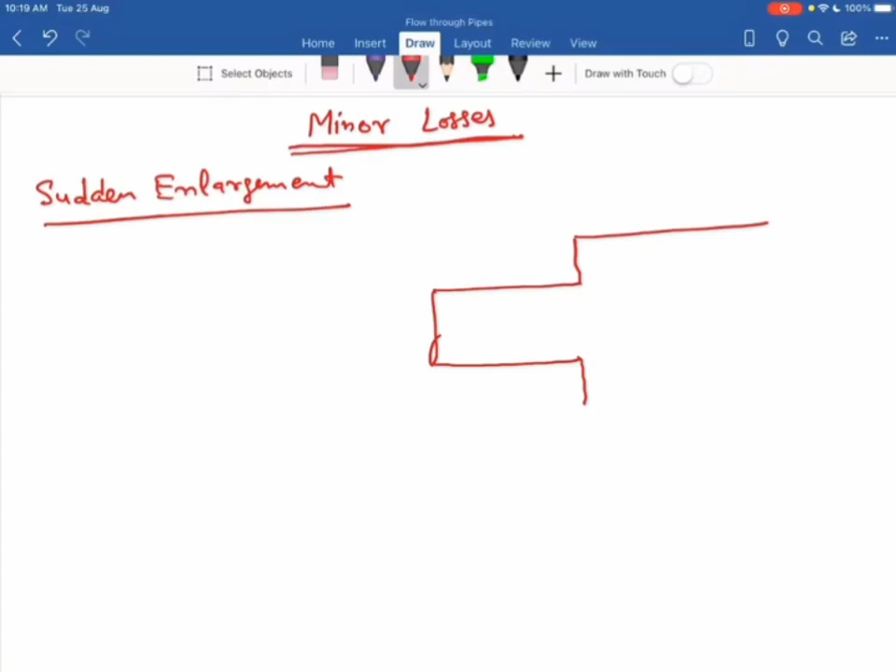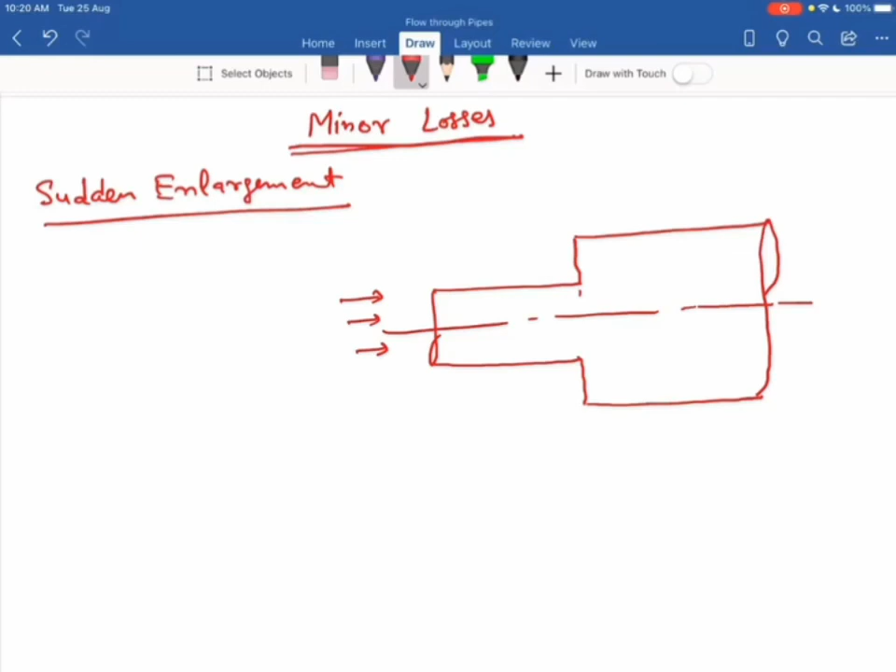Now say we have this pipe. At this section, it suddenly enlarges. This is the direction of flow. So I consider here two sections: one is at the entrance, this is my section 1 and this is section 2.

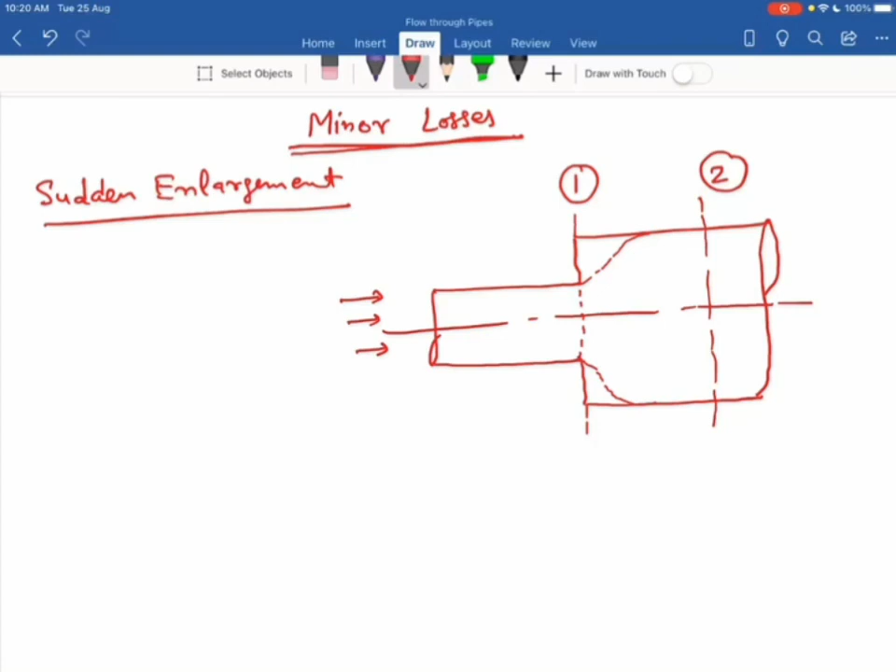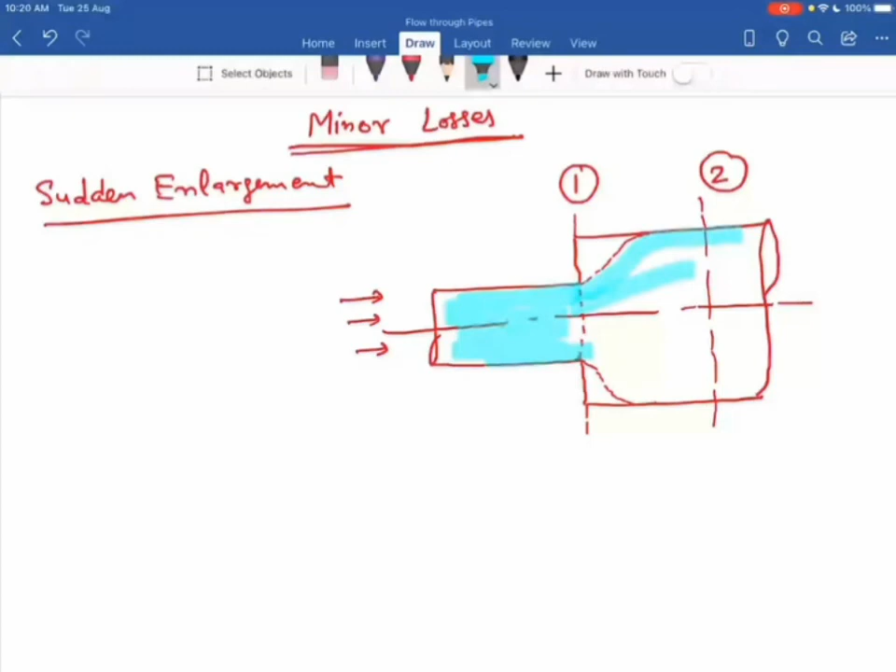When liquid comes out from this end, it takes a shape like this. The water coming out from this pipe takes a shape like this. In this region, you can see the air is entrapped, so that air is under circular state. So I have two sections now, section 1 and section 2.

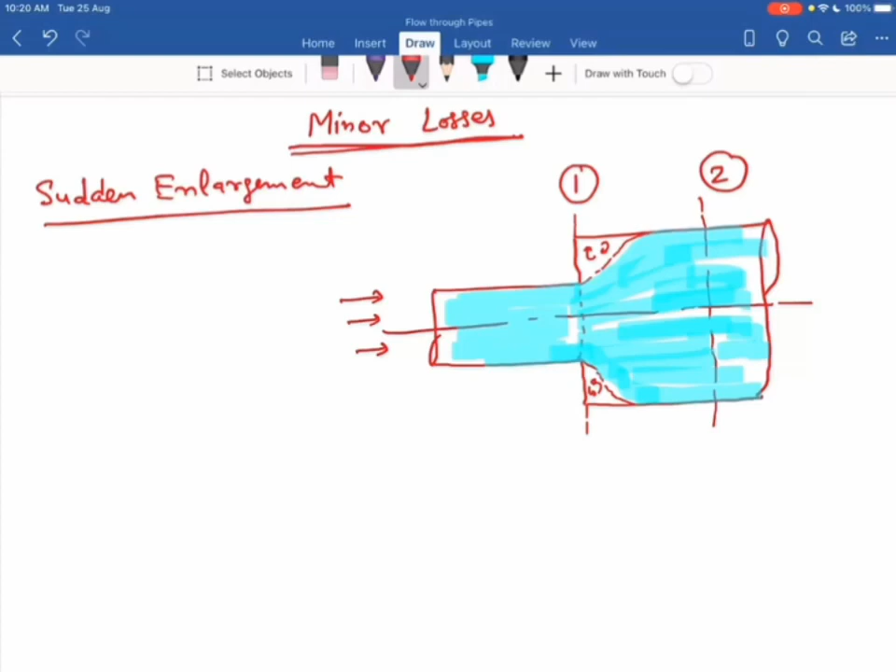At section 1, I say the area is A1. At section 2, the cross-sectional area is A2. Velocity, average velocity at section 1 is V1. Average velocity at section 2 is V2.

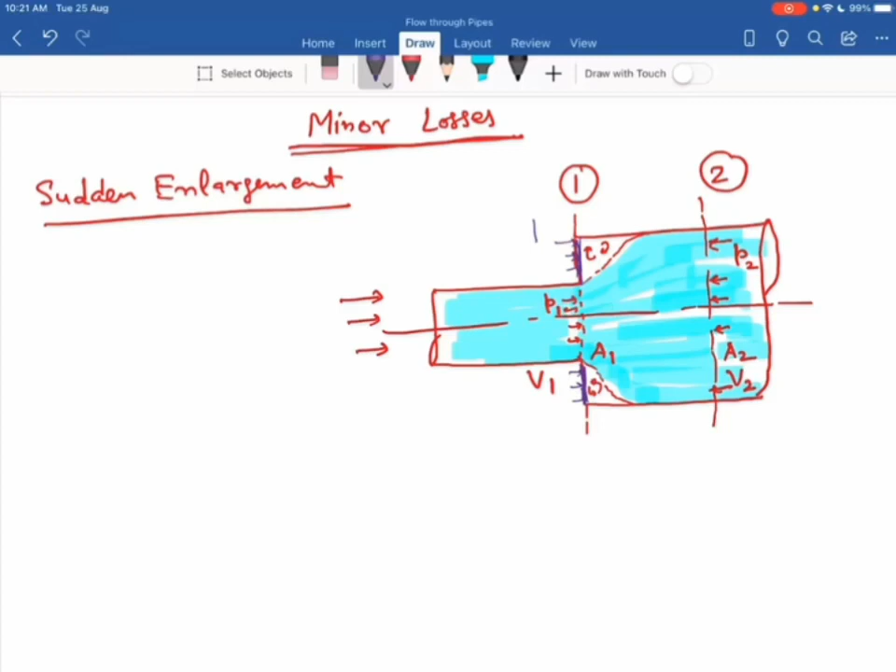The pressure intensities at section 1, that is P1. At section 2, it is P2. Now here one additional part at the top, this one. At this part, say the pressure intensity is Px. This is the pressure intensity acting on this liquid, that is Px.

So now I use here the impulse momentum relation. I apply that relation on the fluid element within section 1 and section 2. So I consider here only the pressure force. I write it as: the pressure force on the element between 1 and 2 should be equal to the change in momentum.

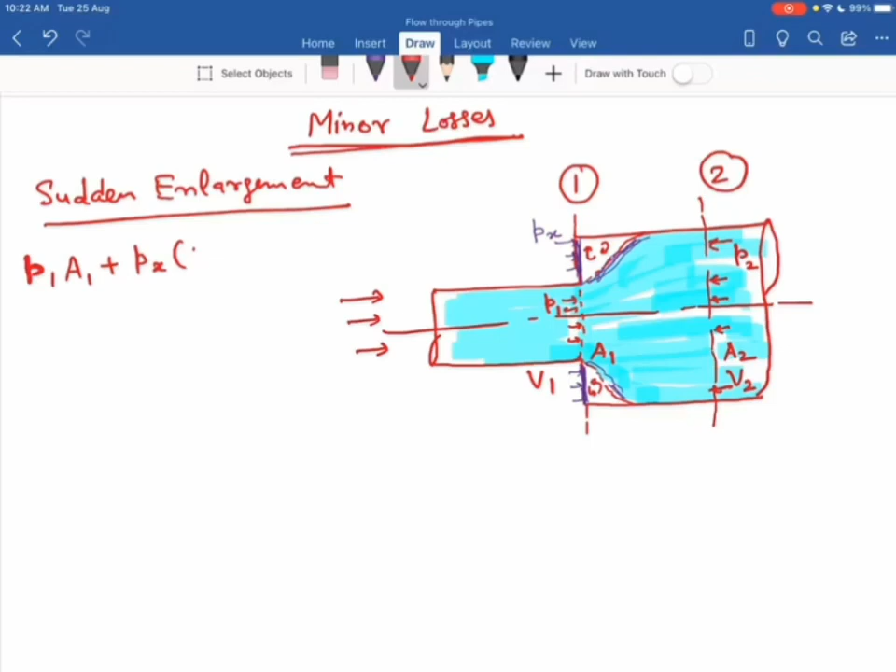So the pressure force I write: at section 1, we have P1A1, plus Px into the remaining annular area, that is A2 minus A1, at section 1, minus P2 into A2. This is equal to the change in momentum, WQ upon G, V2 minus V1.

So from the impulse momentum relation, I can write the net pressure force on the element is equal to the change in momentum. Now I put here one assumption: let us say Px is approximately equal to P1, Px is approximately equal to P1.

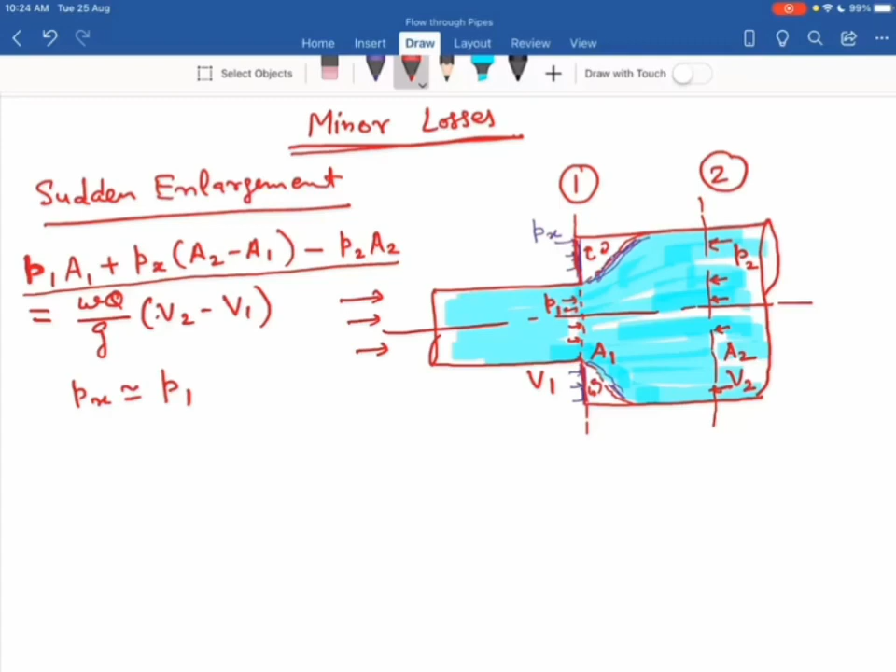So now I write the left hand side again, replacing Px by P1. So P1A1 with the negative sign cancels with P1A1. So I am left with P1 minus P2 into A2. This is equal to WQ upon G, V2 minus V1.

Now I divide both sides by W, or you can say I take this W to the other side. So I write it as P1 minus P2 by W should be equal to, now here is A2, equal to Q upon A2 into G, V2 minus V1. So this is the pressure drop from 1 to 2 due to this sudden enlargement.

So further I write this Q upon A2. Since A1V1 is equal to A2V2 is equal to discharge, Q upon A2 I can write as V2. So I write it as V2 into V2 minus V1, divided by G — this is equation number 1.

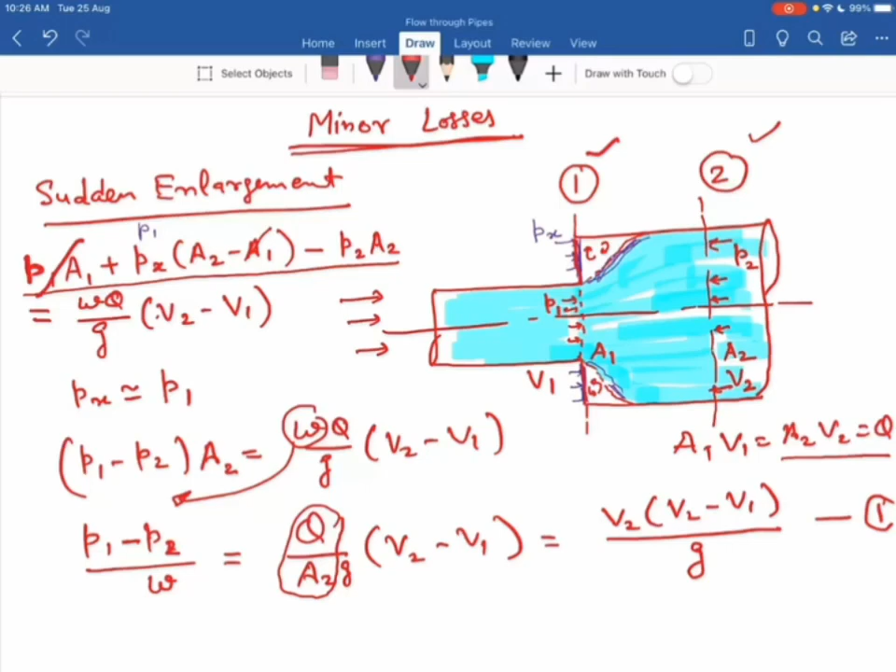So this is the pressure drop from section 1 to section 2. Now I apply the Bernoulli's theorem at section 1 and section 2. So when I apply the Bernoulli's theorem at section 1 and at section 2, I can write V1 square divided by 2G plus P1 by W plus Y1 is equal to V2 square divided by 2G plus P2 by W plus Y2 plus the losses due to expansion.

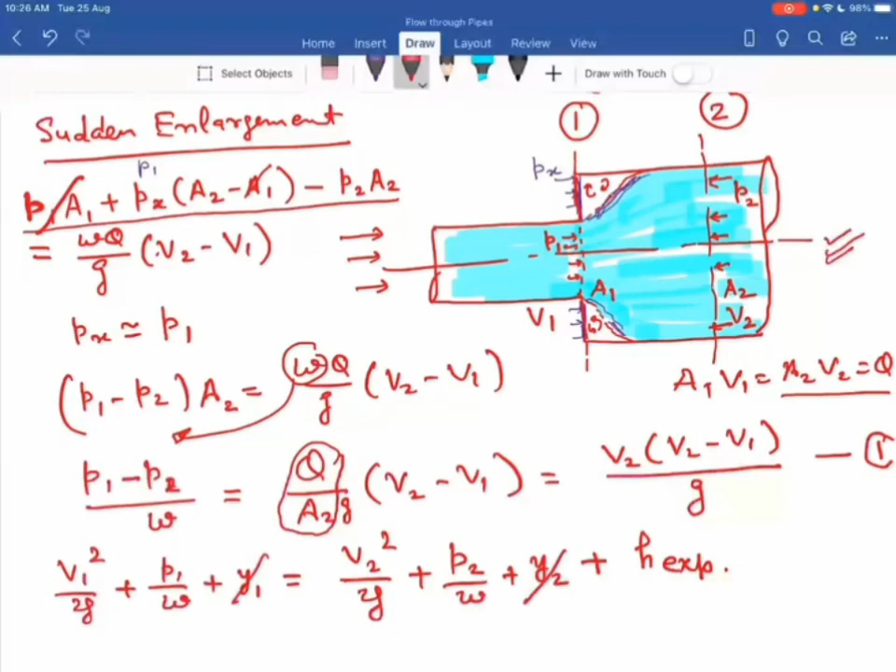Plus the losses due to expansion. So now I rearrange the terms. Also, here this pipe is horizontal, so that means Y1 cancels with Y2. So I write from here, head loss due to expansion is equal to P1 minus P2 by W plus V1 square minus V2 square divided by 2G.

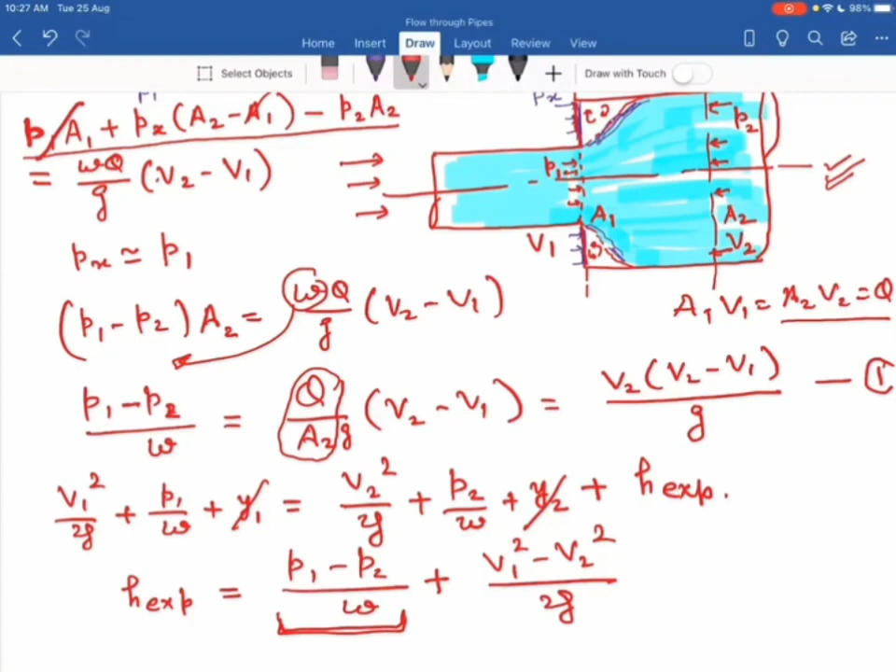So I put here the value of P1 minus P2 by W from equation number 1. So I write again, HEXP is equal to V2 into V2 minus V1 divided by G, plus V1 square minus V2 square divided by 2G. Now I solve this term, and the resulting equation comes out to be HEXP should be equal to V1 minus V2 whole square, divided by 2G.

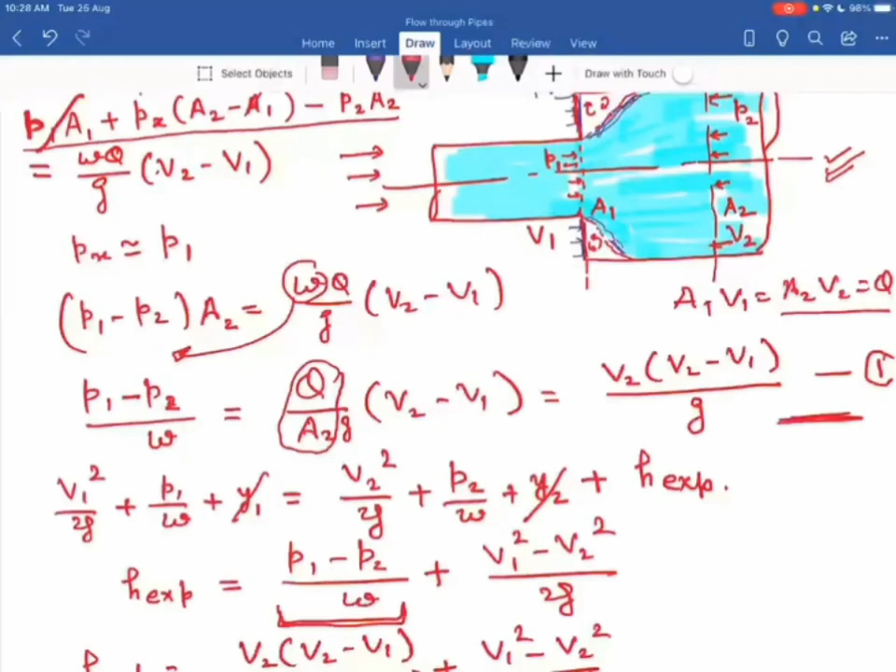So with the help of this equation, we can determine the head loss due to sudden expansion. That is one type of minor loss. In this formula, you have V1, that is the velocity at the minimum section, and V2, the velocity at the enlarged section, that is the maximum section. So the square of that, divided by 2G, gives you HEXP.

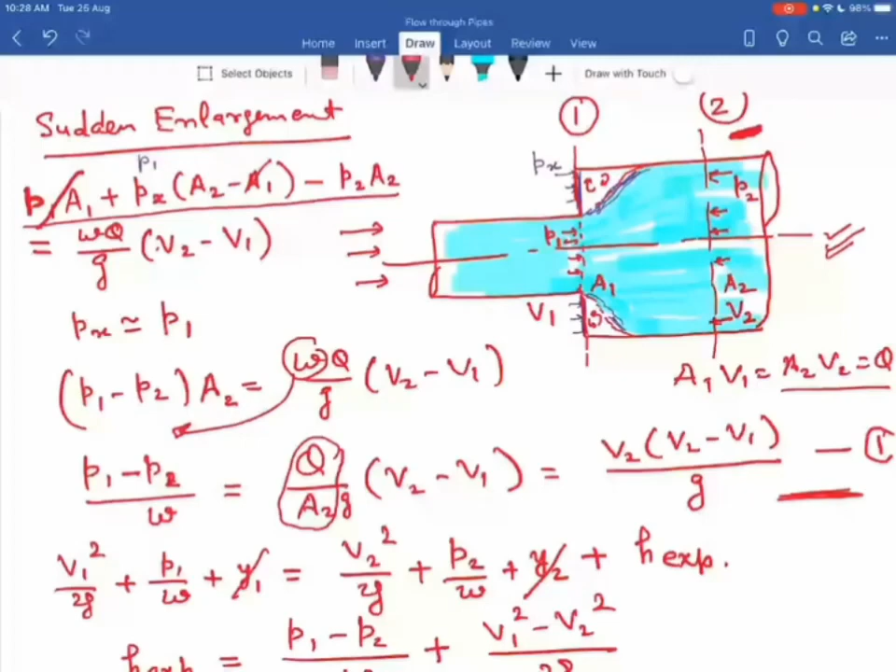Now I can write this equation also into another form by using A1V1 equal to A2V2. So I find from here the term V2, that is A1 upon A2 into V1, and put this value of V2 into this equation.

So then I write HEXP again, this comes out to be 1 minus A1 upon A2, into whole square, V1 square divided by 2G.

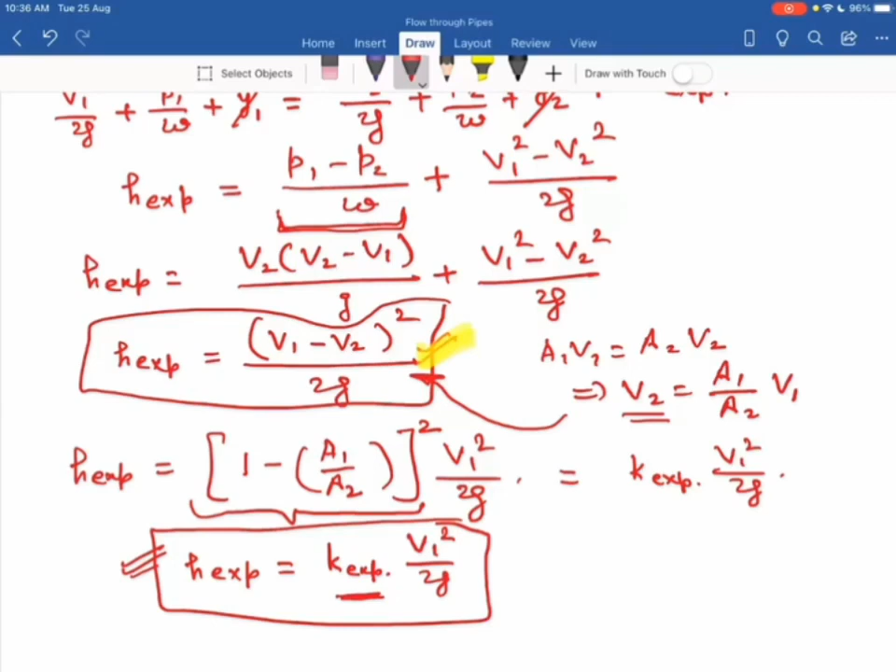Now this term depends upon the shape of the pipe, so I write it as one constant, KEXP, into V1 square divided by 2G. So HEXP is equal to KEXP V1 square divided by 2G. That means the minor loss due to expansion is one constant multiplied by the velocity head corresponding to the inlet velocity, that is V1 square divided by 2G.

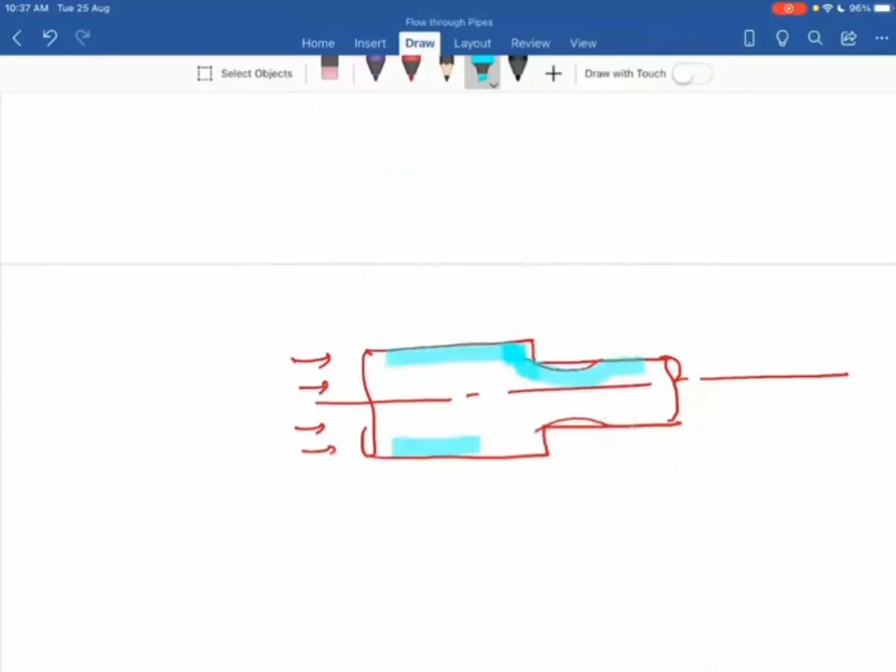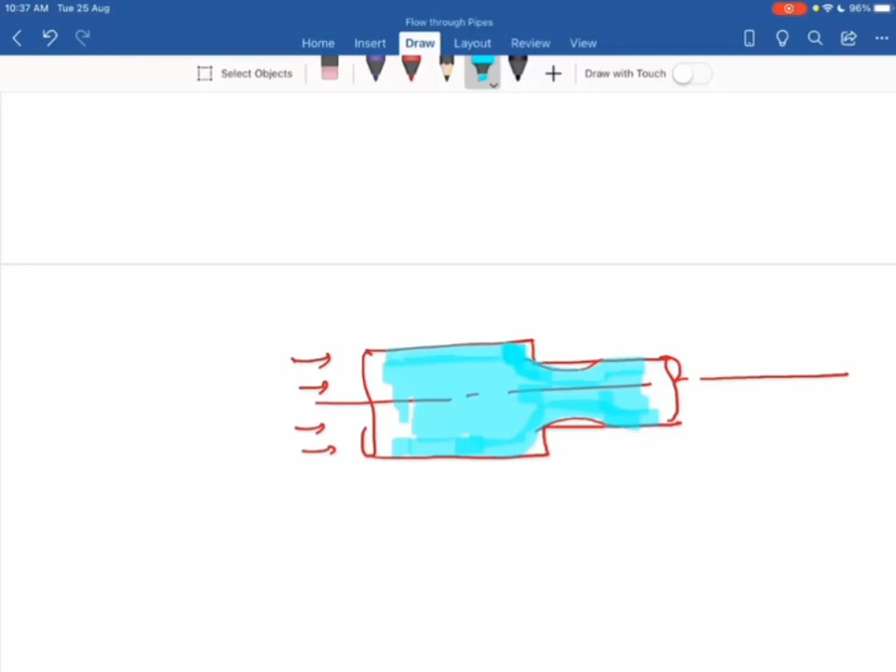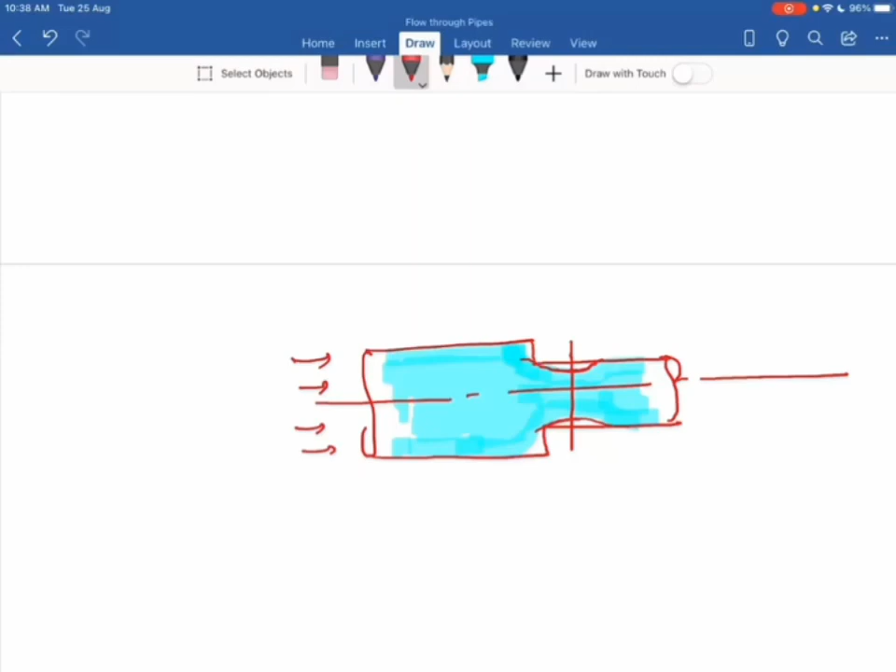So then I take the second loss, due to sudden contraction. In that arrangement, this is the direction of flow. When liquid coming out from this end, it forms something like this due to inertia. Liquid coming out from this pipe like this. Now this cross section is minimum for the jet, the cross section is minimum over here. So this is called vena contracta.

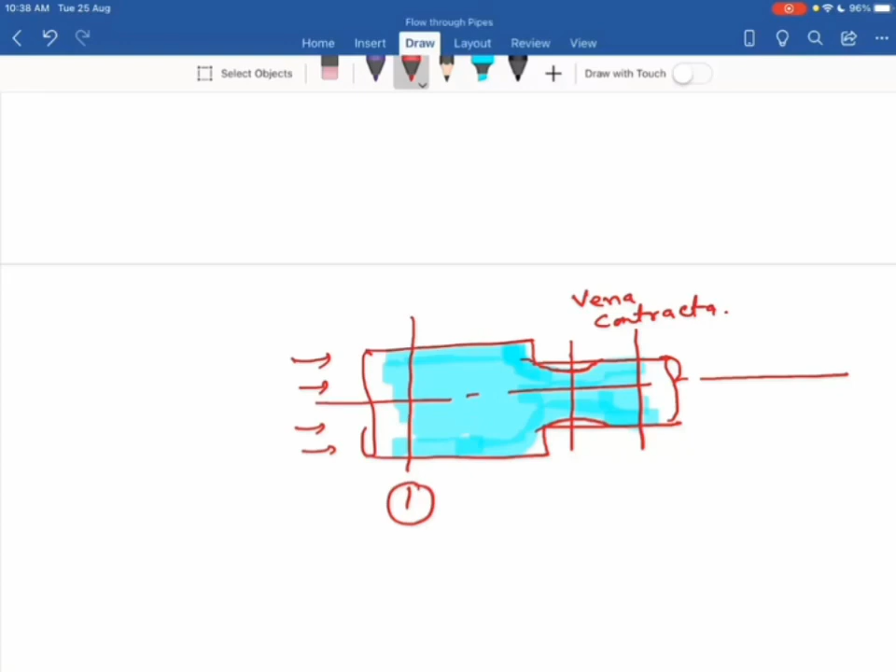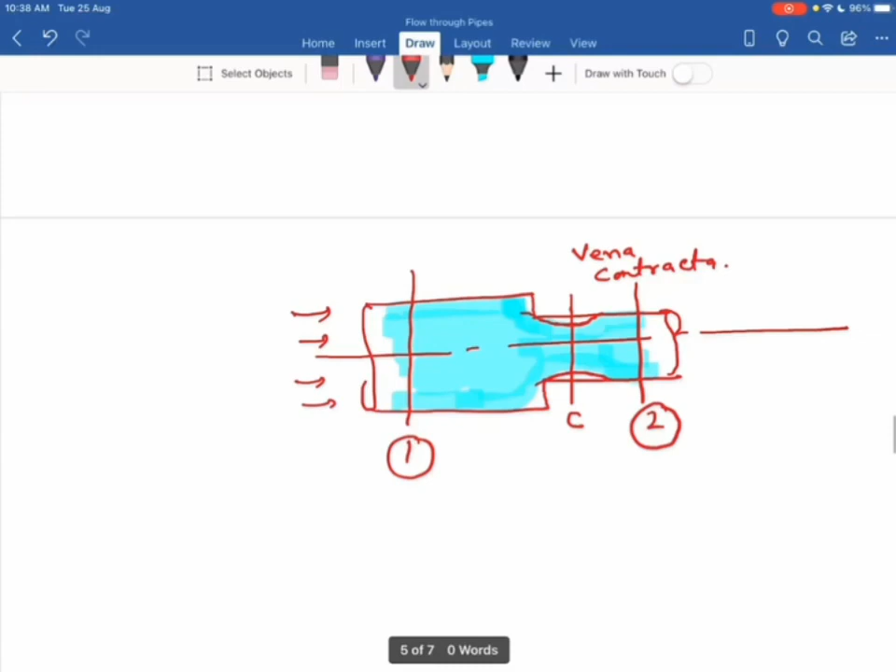So now I mark three sections: section 1, section 2, and another section, section C, that is at vena contracta. At section 1, I write velocity as V1. At section 2, velocity V2. At section C, velocity VC. Cross-sectional area at section 1 is A1, at section 2 is A2, and at section C is AC.

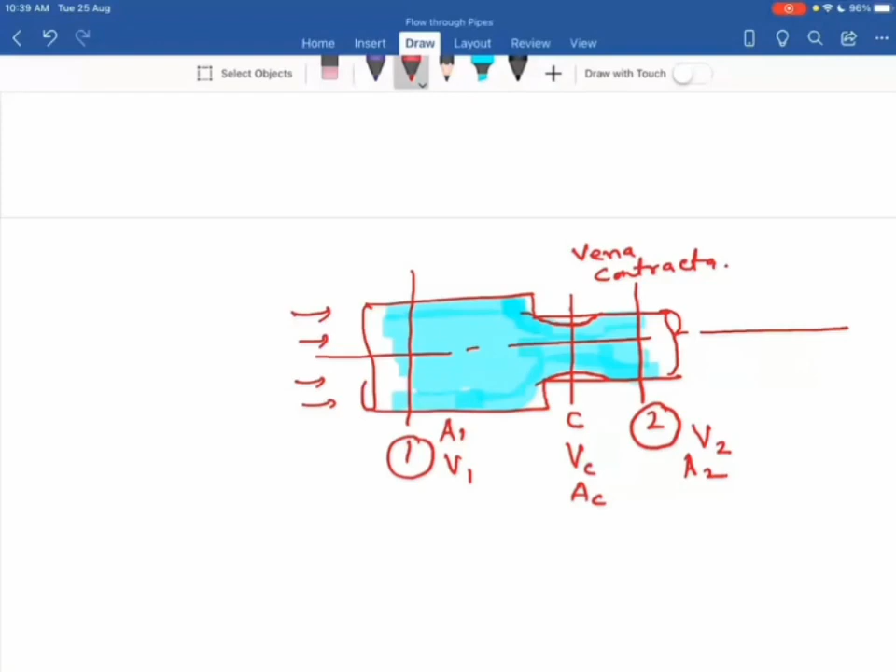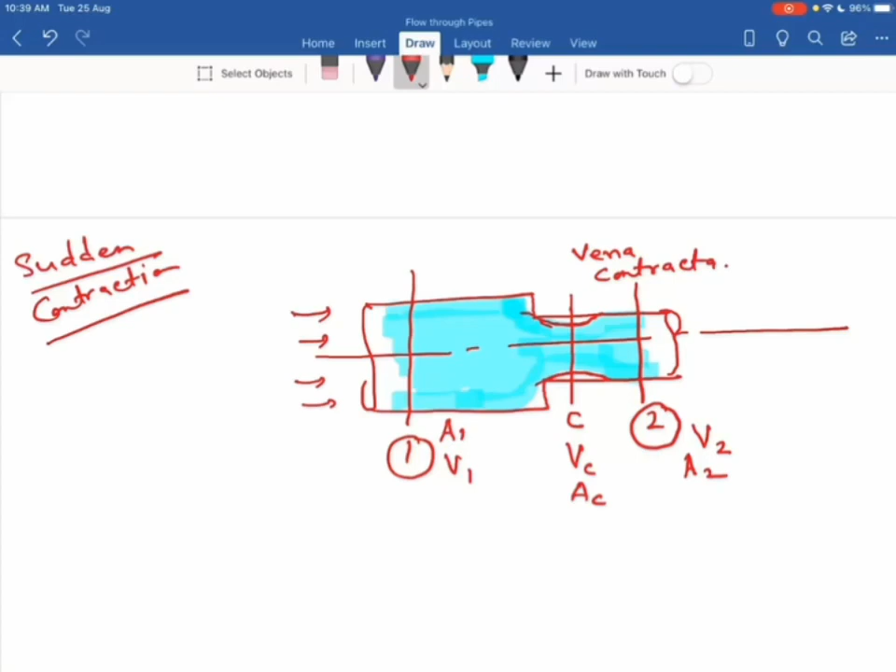Now the main concept I use here to find out the minor loss due to sudden contraction is that when liquid coming out, at this section I divide this portion into two parts. One, when fluid is converging, the second, when fluid is diverging. At vena contracta, that is formed due to sudden contraction, I divide that portion into two parts: one is the converging part, second is the diverging part.

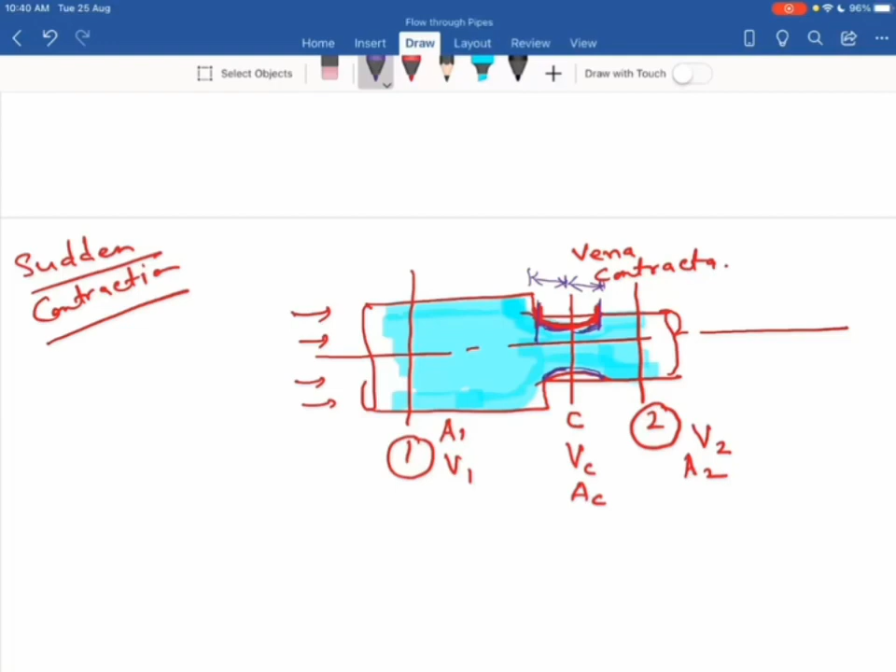In actual situation, the length of the converging part is very less as compared to the length of the diverging part. So on the basis of this concept, I can write that the loss due to sudden contraction, the main contribution in this loss, is due to the expansion from C to section 2. Are you able to understand? The loss due to sudden contraction is mainly due to the expansion of flow from section C to section 2.

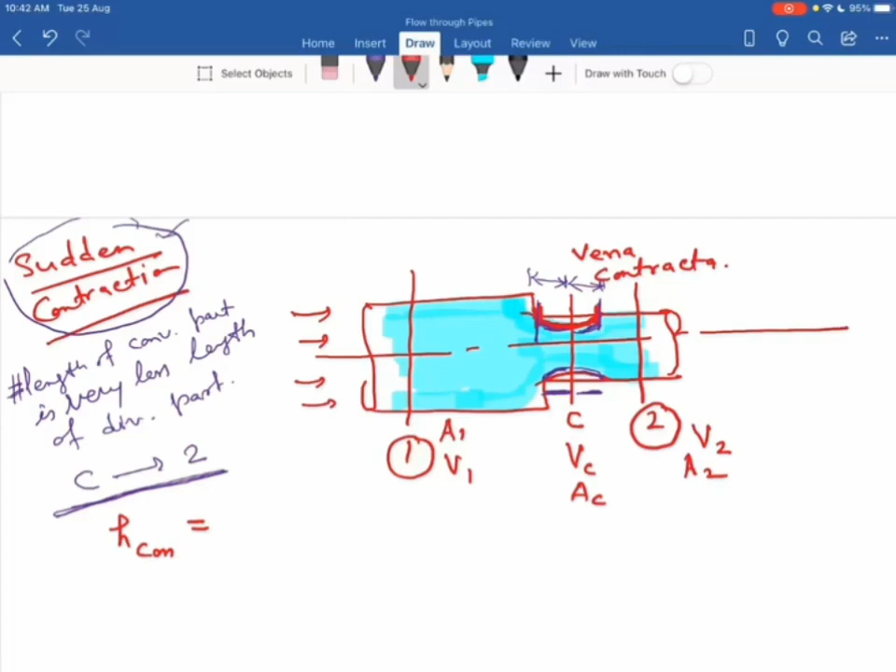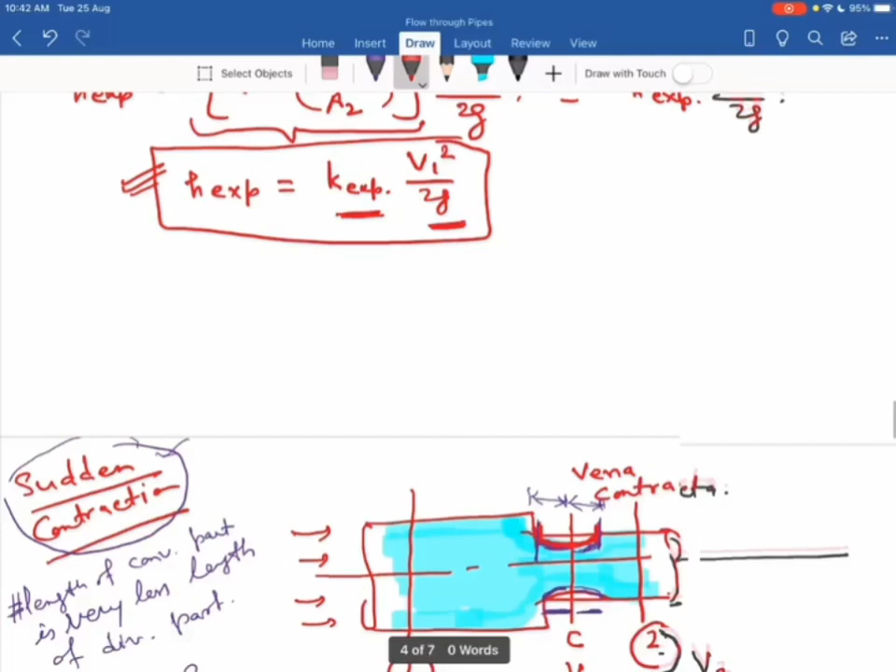So now I write the loss due to contraction as HCON. Now this loss is equal to, see the formula, V1 velocity at the start of expansion, so I write it as VC minus V2, whole square divided by 2G.

So further I put here the value of VC. I use the relation AC VC is equal to A2 V2. Now further I have one more relation, that is AC, area of cross section at vena contracta, divided by area of opening A2, I write it as CC, coefficient of contraction.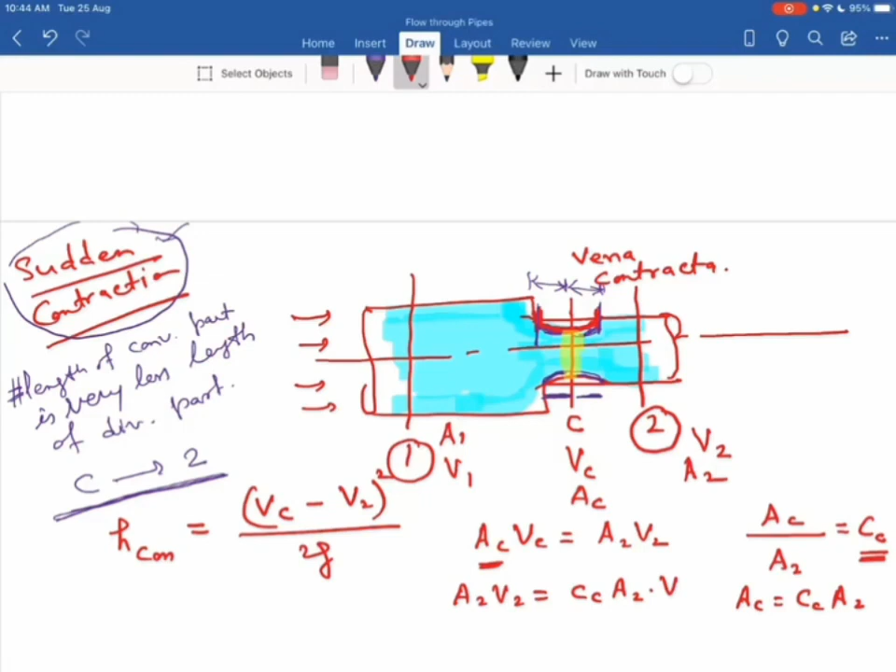So AC is only this area, this cross-sectional area. So AC upon A2 I write as CC, coefficient of contraction. So I write here AC as CC into A2. So I replace here AC, and write it as A2 V2 is equal to CC into A2 into VC. So I find from here the value of VC. VC comes out to be, A2 cancels with A2, so V2 divided by CC.

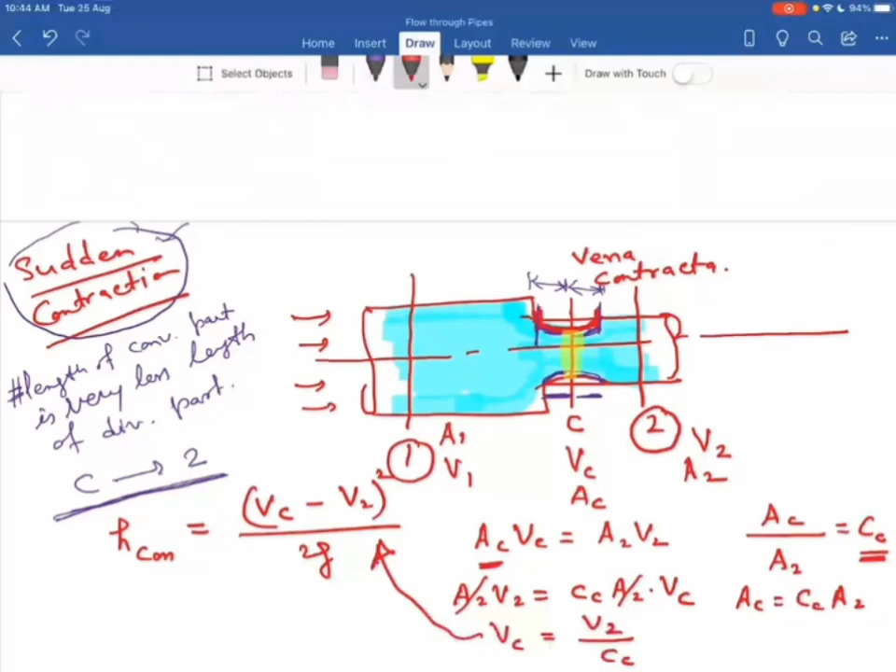So I put this value of VC into this equation. So again I write HCON is equal to, put here the value of VC, that is V2 divided by CC minus V2, this whole term squared divided by 2G. Then whatever common term is coming, take it common, it comes out of the bracket. So I can simply write it as 1 upon CC minus 1, whole square, into V2 square divided by 2G.

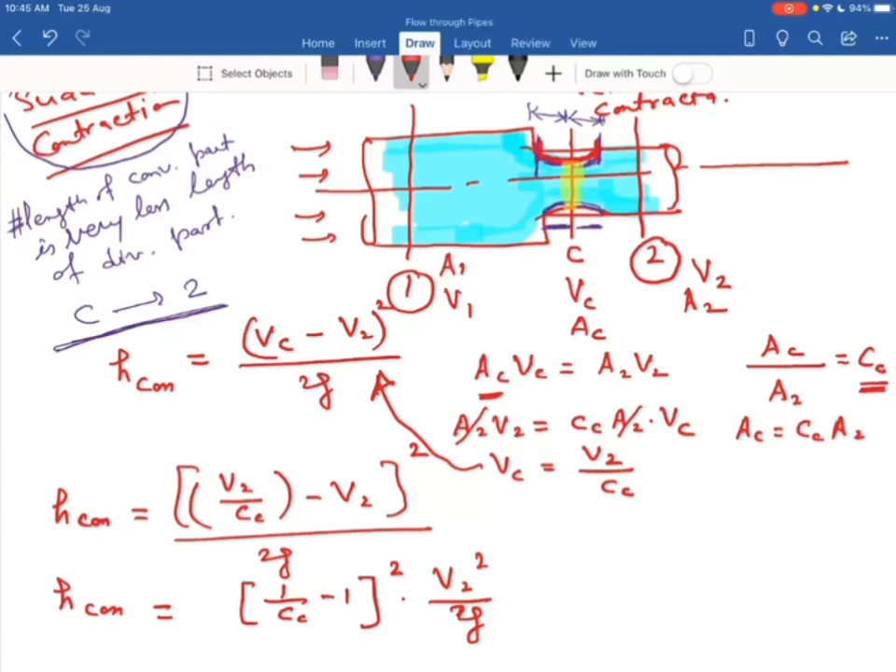Then further I can write HCON is equal to, now I write this term as one constant because again this term depends on the geometry of the pipe, so I write it as KCON into V2 square divided by 2G. Now you can again see this loss is one constant multiplied by the velocity head corresponding to the leaving velocity. So HCON depends on V2 and HEXP depends on V1.

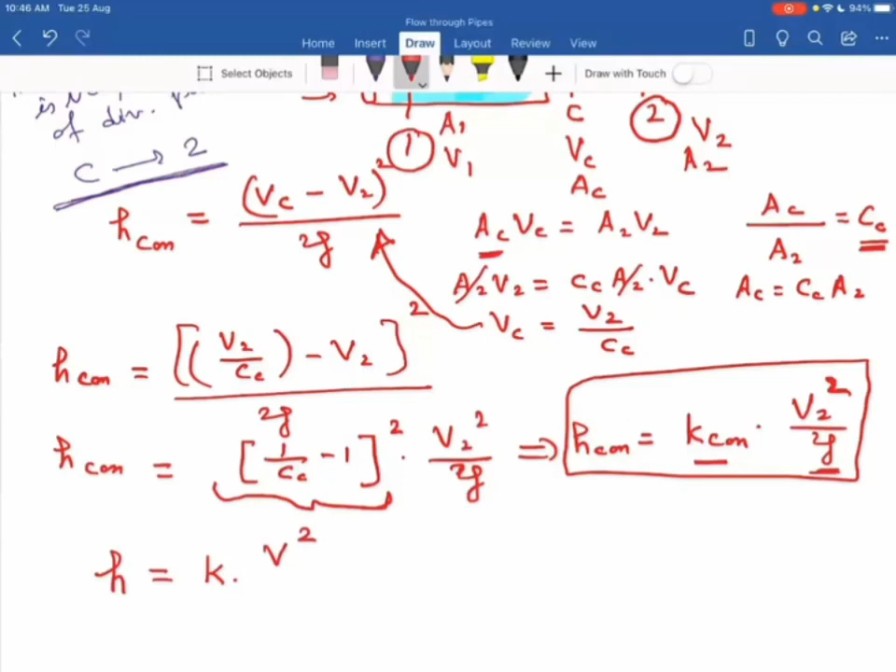So on the same lines, I can write the minor loss due to bend, due to other fittings, also as a constant multiplied by the incoming velocity square divided by 2g. So any minor loss due to bend, T in the pipe fitting, or any other fitting, I write it as a constant multiplied by V square divided by 2g. Again, this constant depends on the geometry of that bend or fitting available in the pipe.

Similarly, the last two: entry loss and exit loss. For entry loss, the K factor I write as 0.5. And for exit loss, I write K as 1. So the value of K for entry loss is 0.5 and for exit loss the value of K is 1. So these all are the formulas for minor losses.